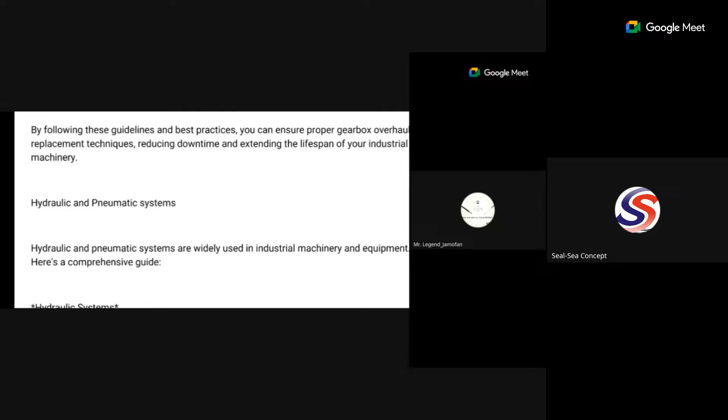So I want to start with hydraulic and pneumatic system.

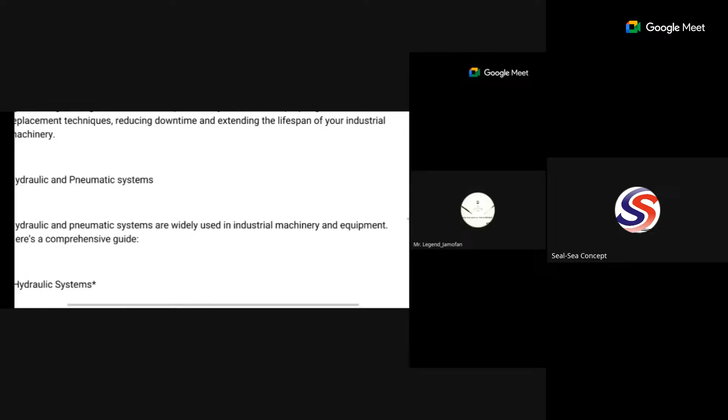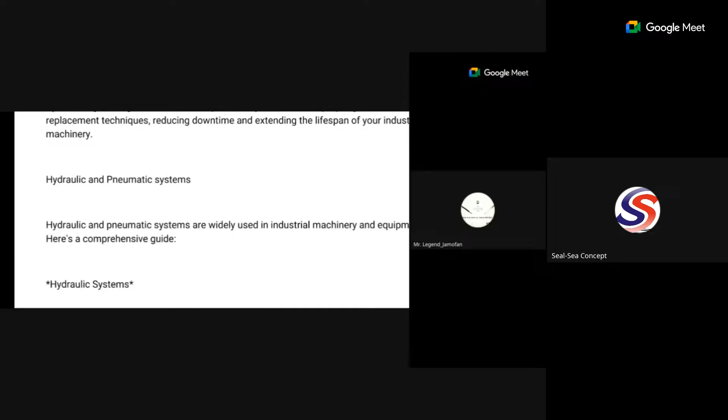So I want to start with hydraulic and pneumatic system. We have really discussed almost the nook and cranny of things that we need to know as basics for machinery maintenance. We have also discussed those that affect the mechanical, like in our second class, we discussed a lot about that.

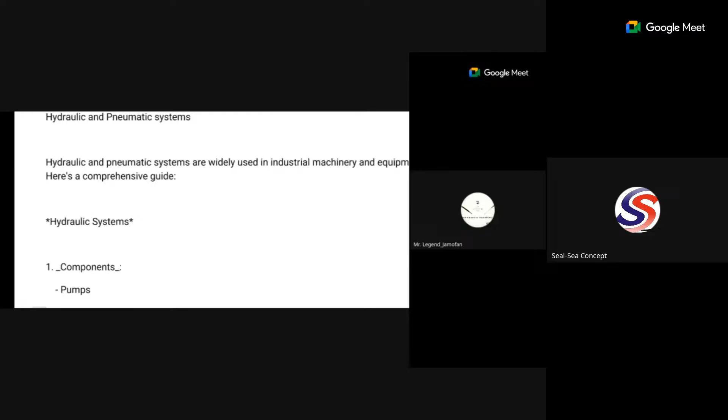I want us to start from hydraulic, then talk about some of the mechanical also, then dive into some part of the electrical, so it will be an all-rounder kind of training, because the plan is to touch all these areas for different kinds of people that we have from different fields who actually registered for this training. So when we talk about hydraulic and pneumatic systems, many of us might have interacted with some of these machines, operated them, or have them in our industrial environments. They are industrial machinery and equipment. Hydraulic system has to do with usage of oil to power some of this machinery, and some are using air as the power, which is pneumatic.

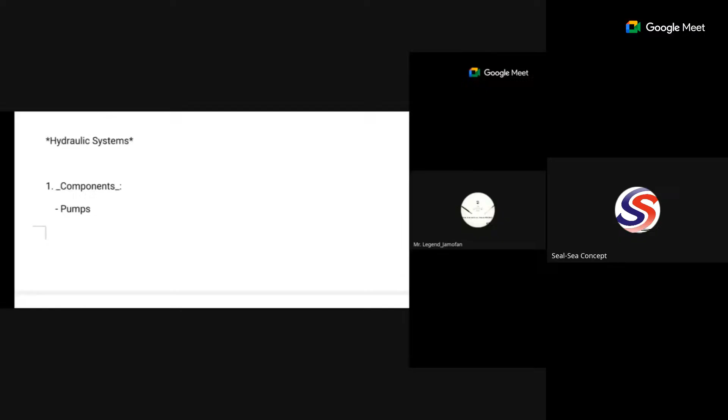So let's briefly look at the components of hydraulic system. In hydraulic system, you can have motors, we have the cylinder, because it's making use of oil. So you have the cylinder, you have the valves. The valves is like an open gate, used to actually regulate the pressure.

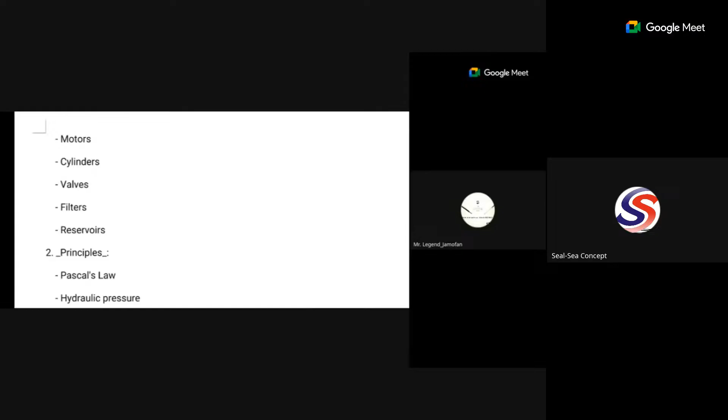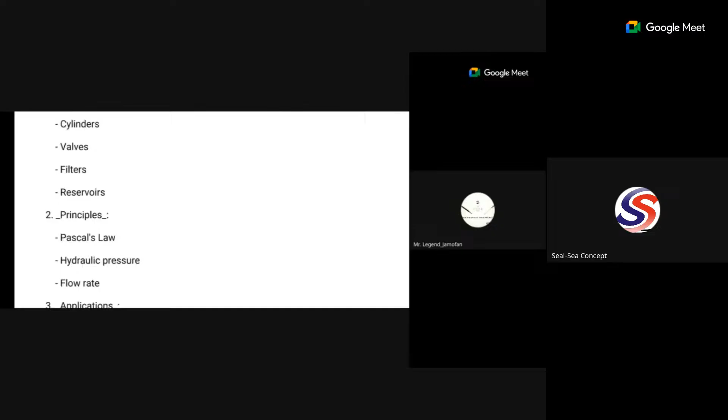We have the filters. I explained some of these in second class, talking about how your oil shouldn't be contaminated. So we have filters there that can filter some of the contamination. In most cases, when performing maintenance, you have to check the filters also, to see if there's clogging happening, holding back debris over time. It's like your gutter -- if you fail to remove those blockages, the water will not be able to flow. Same thing with your filters. If you have contaminations or dirt accumulated on it, sometimes you have to bring it out and clean it, and sometimes you have to change the filter completely, depending on the system you are dealing with.

Pardon me, I'm using a different device. We also have reservoirs. This reservoir is to store the oil that you are using. The oil that you're actually using, you use reservoir to store it.

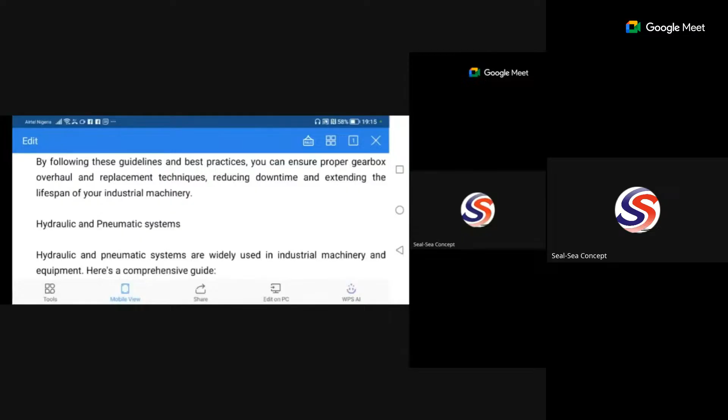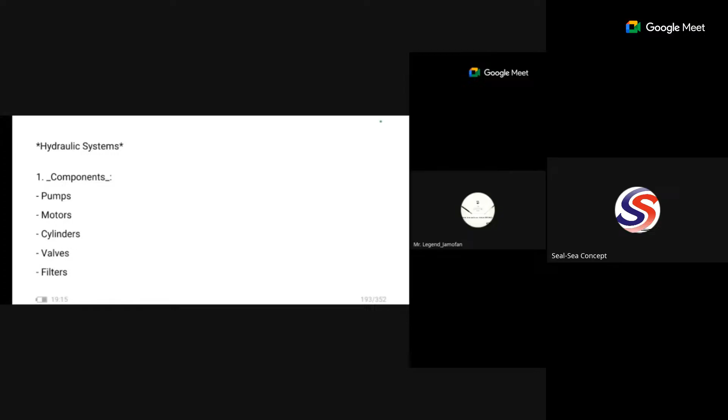So we have the hydraulic components: we have pumps, we have motors, we have cylinders, we have valves, we have filters, we have reservoirs, for the storage of this oil. And what is the working principle that hydraulic system actually works on?

It works on Pascal's law. How many of us still remember Pascal's law? How many of us in the house, the engineering, science-oriented people among us -- in fact, all of us, I expect us to be science-oriented. How many of us still remember Pascal's law? Anybody? There's nobody in the house that remembers Pascal's law. It's been a long time. I think this is just not possible.

Pascal's law is the law applicable when you're talking about pressure -- it governs the transmission of power, the transmission of pressure within that particular container. And when talking about the formula, that's what you actually brought up. But in my own training, it's not the formula I want to treat, it's the application. So, as you rightly said, pressure itself is equal to force over area. That's pressure. But Pascal's law concerns the application of how pressure transmission is in an enclosed container.

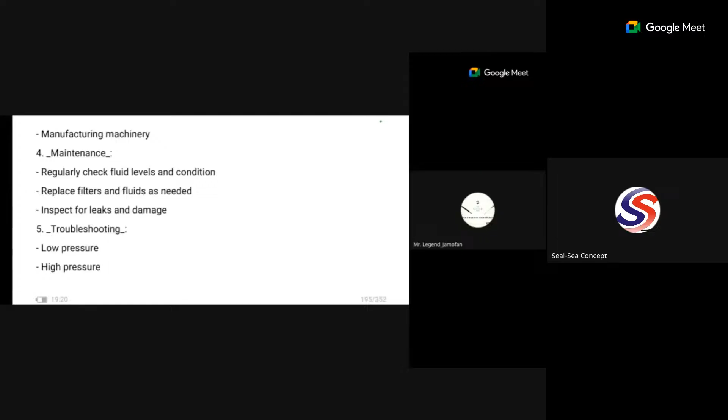Whenever there is a problem with a hydraulic system and you have to troubleshoot, most of the issues you can have is either low pressure, high pressure, leaks, or clogged filters. It's just like packing dirt, dirty or contaminating things, dust and all that, they will clog the filters.

Filters are where the oil is actually passing through. We put the filter there so that only pure and clean oil will be able to flow into the system, and anything that has to do with dirt or contamination in the oil can be retracted by the filter.

So you can imagine if the filter is doing the job over and over again for a long time, and you just leave it there without replacing it. In some systems you have to clean it, but it's good that when performing maintenance, you just change it because of the clogging that may happen. So that's briefly about hydraulics.

Pneumatic systems. In pneumatic systems, we also have components. We have compressors, we have air tanks, we have valves, doing the same work I explained when discussing hydraulic systems. We have cylinders, just as we have in hydraulics, we have motors, that's the drive itself, and then we have filters.

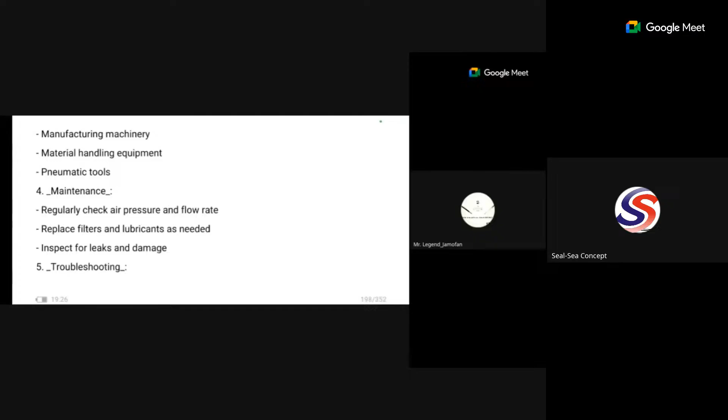Inspect for leaks. How do you carry out troubleshooting? Low air pressure, just as we have in hydraulic, there can be low pressure, there can be high pressure. Within the hydraulic system, or within the pneumatic system, there can be leaks. These are the major issues that you have with the system.

So when you want to troubleshoot a pneumatic system, in your mind you're asking: is this due to high pressure? Troubleshoot with the mindset that it could be low pressure. Troubleshoot with the mindset that it could be leaking somewhere, and troubleshoot with the mindset that the filter could have clogged somewhere. So if you follow this troubleshooting, I'm assuring you, you will resolve the matter.

You see how we put everything together there. So if you have this form, this direction about troubleshooting, it will not be difficult for you to resolve any issues relating to pneumatic or hydraulic systems. So let's bring the common issues together now.

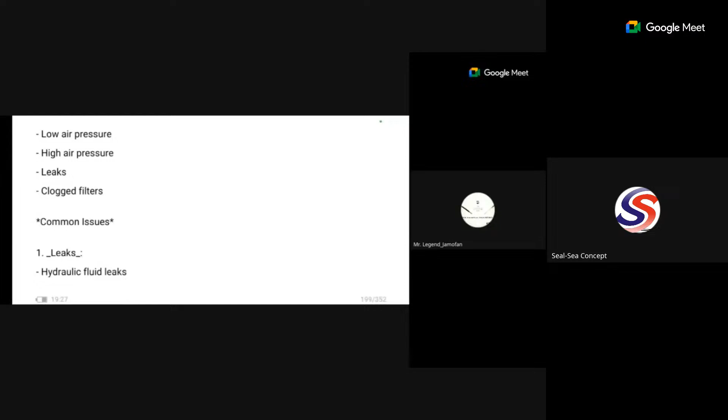The leaks that I explained in the hydraulic system, when you're talking about leaks, we are talking about fluid leaks, when the oil you make use of is leaking somewhere. So that would actually be the problem, you look for leaks in the oil. When it comes to pneumatic, you look for air leaks.

When we talk about clogged filters, the fluid filters could clog, as well as the air filters, as I've explained. You should also check for worn or damaged components, maybe the hydraulic cylinders or the pneumatic cylinders, they could be worn out or damaged. Your valves should be inspected.

There will also be problems with the use of incorrect fluid. I've explained that, and I can't say that more than enough. You have to use the prescribed fluid for the system.

It is very important that the air pressure should be monitored also. The hydraulic fluid pressure should be monitored, and the air pressure should also be monitored. Many people don't know that. People just take their car to vulcanizers, they should actually gauge it for them. And when they gauge your car, the pressure of your tire can be too much, and that would be dangerous for you to drive with.

That is why if you see a very good vulcanizer among others, they will show you, they will bring out the pressure gauge. In fact, you should ask for it. There are many people that even have it in their car. It is not too much, it does not really cost that much for you to have.

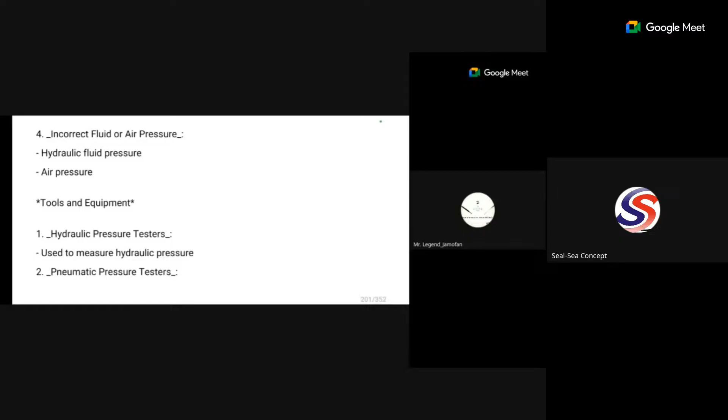Pneumatic pressure testers, okay, for measuring air pressure also, like the one I mentioned about tires. They are there for you to use so that you'll be sure that you're not working with, or driving with, too much pressure or low pressure. In the case of a car, I'm using it as an example. Okay, we use flow meters, we use multimeters in the system.

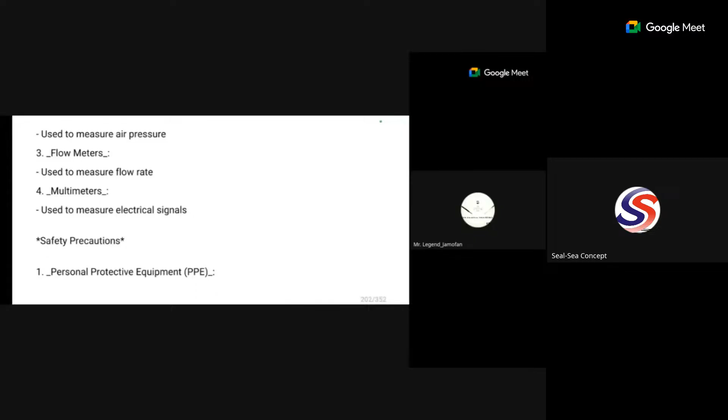The safety remains the same, like we have mentioned in our second class. The safety precautions are always almost the same. Your PPE, your lockout tagout, before you perform maintenance on it. It is happening in a confined space. Confined space entry happens to be where there's a restriction to the entrance of where you want to go and work.

Let's say just one way in. There are some places like that, one way in, one way out. That's confined space, and only one person can bodily enter the place, and you can use only limited time. Maybe if there's anybody here that has worked in a confined space, you can share your experience at the end of the class. So only one person will be able to go in and go out. In fact, in some confined space work, there are people that when they are going in like that, they will have to tie something like a chain to their leg.

Something like a rope or chain will be around their ankle, such that somebody will be outside that will intermittently be checking on them by dragging the chain. So if everything is all right, you kick your leg. The person that is inside, that is working inside, has to kick his leg, drag the chain back, which shows that everything is all right.

If not, if they drag the chain and there's no response, they have to drag him out, because it's a confined space. Sometimes some people go in with additional oxygen to breathe. Sometimes they have to do air tests there to know if they are performing welding work, if there could be fire outbreak or anything like that.

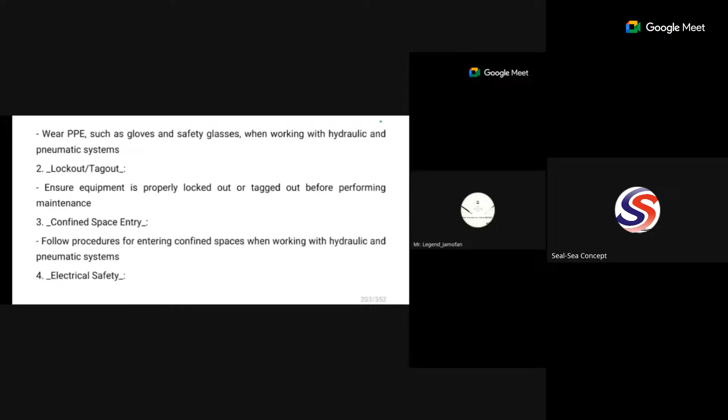So when the pneumatic system that you want to go and maintain is in a confined space, that's what we are talking about. You have to take extraordinary authorization when it comes to safety. Sometimes even the first aiders will be on guard, and everybody will be there because anything could go wrong. So follow the procedures for entering confined spaces when working with hydraulic and pneumatic systems. It is very important. Those are the safety precautions you have to take when working with hydraulic and pneumatic systems.

So what are the best practices recommended for this? Follow the manufacturer's instructions. I've said that over and over again, so I don't need to emphasize on that. Follow the manufacturer's instruction, okay?

Use proper tools to perform your maintenance. Don't try to force tools. Don't say you want to improvise and use a bolt that is supposed to move with a 13 spanner. Sometimes you see most of those things actually happen. You are using a wrong spanner, or a wrong tool on a particular bolt, on a particular joint, for a long time.

So what will you see? You will see that it will round off. Even when you bring the correct tool, you won't be able to open it again. It's sometimes a human fault. Most of these things are human faults, because you are using the wrong tool to perform your maintenance or to do your work or installation.

So use proper tools, okay? The personnel that will carry out the maintenance must be trained personnel, somebody that is trained to do it. We shouldn't just push people to go and say, oh, you can do it, it's a very simple thing, or something that you just watch a video and then want to try it. No, you have to be trained on it.

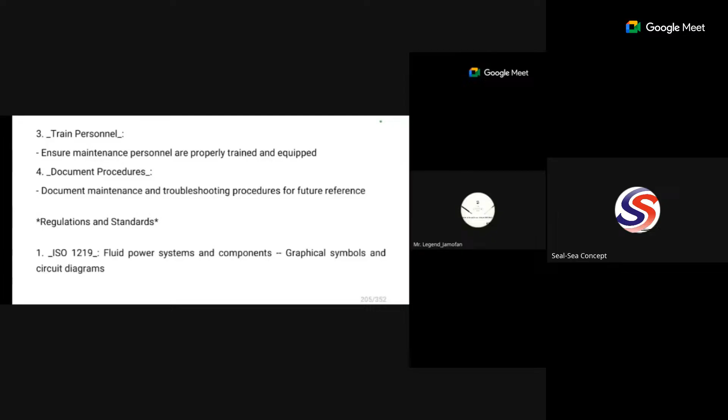If you actually do all these things - should you check the oil level? Must you change the oil? Must you change the filter? Must you do this and that? All those things should be documented. It shouldn't be assumed that you know.

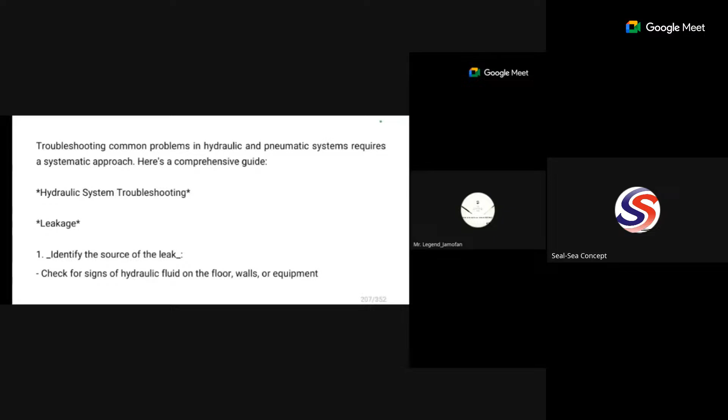And we have some regulations and standards here. I just put it there for you to see that there are standards and regulations that manage all these things across the factory. So I've talked about hydraulic system troubleshooting.

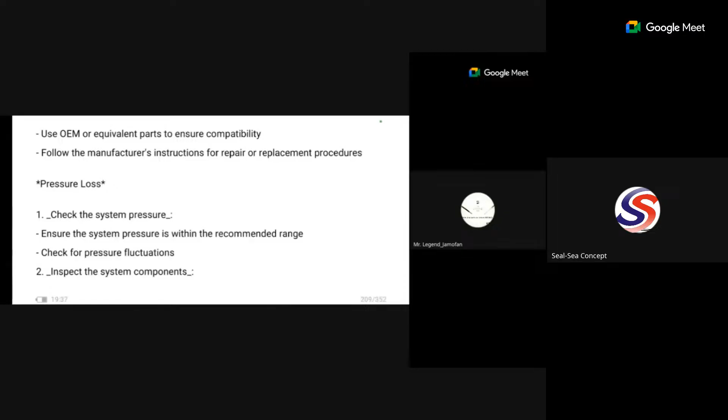So we talked about the pressure, okay? Pneumatic system troubleshooting, I've discussed it. Everything I explained, I tried to elaborate more on. That's what you are seeing that I'm actually sliding, just to elaborate more on it so that you can have my explanation documented. So,

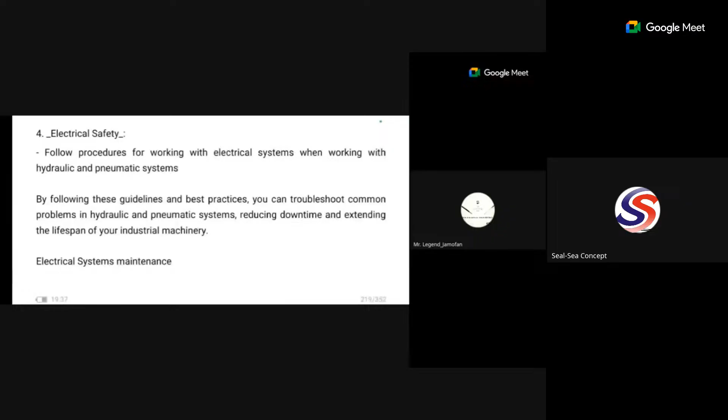All right, so let's talk about electrical system maintenance. What do we do in the course of maintaining electrical system? The regular maintenance, which is the new one, the scheduled one, the popular one that I've been mentioning, that is very important - that's the preventive maintenance.

So the preventive maintenance of electrical systems is that you need to do regular inspections. When we talk about regular inspections, you need to check the system for wears, damages, or overheating. This is very common with electrical systems. Overheating is very common with electrical machinery - most of them suffer a lot from overheating.

So you need to do these regular inspections on them, and you need to inspect electrical connections also. Check your wiring and check the components. It's very important. Sometimes you may have a loose connection, sometimes a dangling connection, sometimes you can have a burnt connection already.

So you need to actually check, because if there's overheating, some parts when you have connected or joined together might be suffering from burnt connections. You need to check this occasionally.

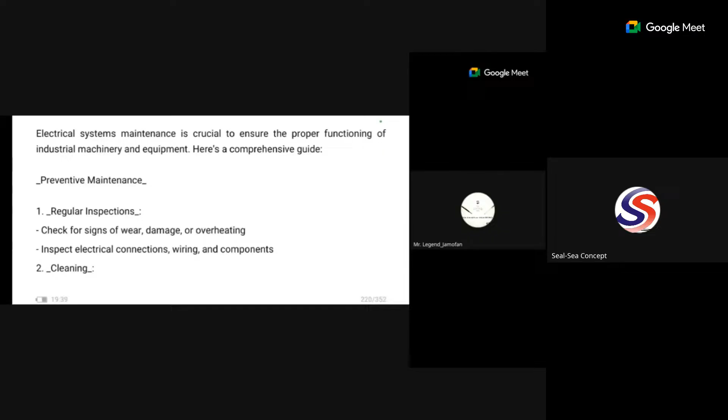When performing maintenance on electrical machinery, you need to do cleaning. Dust alone can make you lose a proper connection, especially with connectors used to connect supply from one joint to another. Try to make sure the place is well dusted. In most cases we use compressed air set to a moderate pressure so it won't affect the dangling wires. We direct it to all those joints or junctions where connections have been made and dust may be covering the conducting area, and we blow away the dust to clean it.

Sometimes people use the compressed air that I mentioned.

Electrical systems must also be well lubricated. Those lubricants are applied to the moving parts, like I explained about friction. You apply lubricant to the bearings and to the gears. The bearing must be lubricated because it is rolling. We have different types of bearings: roller bearing, and a needle type for very small or tight spaces, and ball bearings.

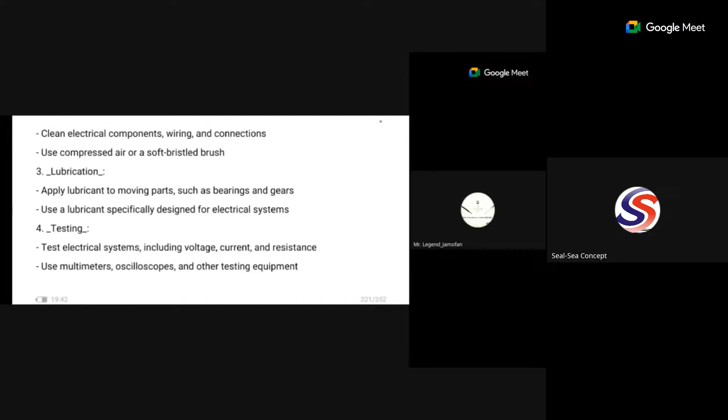You can also test for continuity - I'm going to elaborate on this. You can do insulation tests to be sure the insulators have not broken down, so you won't receive a shock from the system. I'm going to elaborate on this as well.

Corrective maintenance on electrical systems or machinery refers to troubleshooting, because corrective maintenance has to do with repair, as I mentioned. When the system or machine runs to failure and you have to repair it, bringing it back to function, that's what we call corrective maintenance. We've explained this a lot.

So what you need to do is first identify the source of the electrical fault - you need to know what is wrong with the system, which part has actually failed. That's what you need to troubleshoot for. In doing that, you can use testing equipment or diagnosis tools, or you can use observation.

You can, with power on the system, see if the electric motor is struggling, trying to work but struggling like it's overloaded. So you can know the proper places to check, or use a multimeter to carry out troubleshooting. Then you either replace the electric motor or a part. Some factories I've seen, when the electric motor is faulty, bring it out and replace it. But in most industries where I've worked, they send it to the workshop.

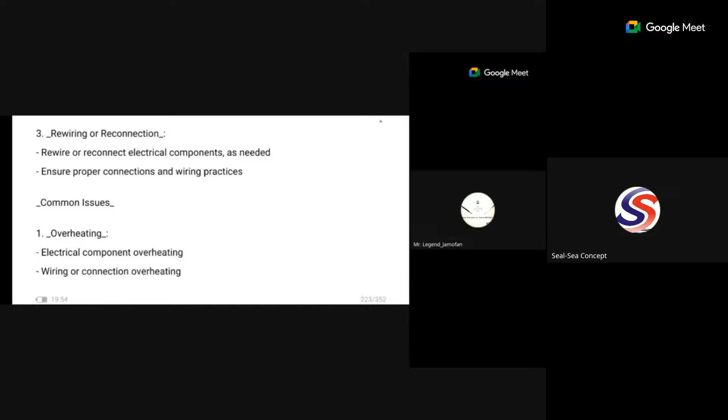Short circuits happen in the conductor carrying live - that's the live conductor - shorting with the ground, that's the neutral. Let me try to bring this up. Let me bring up my whiteboard so that we can see what I'm talking about. I don't want to assume that we are all electrically oriented.

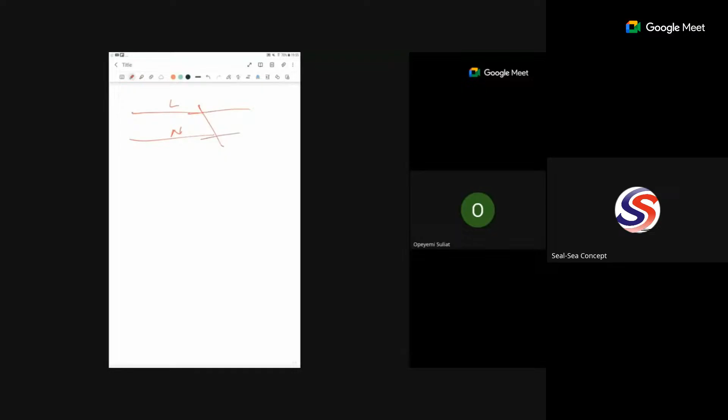Of course, even the mechanical guys know that there is always live, there is always neutral. So if this actually shorts with this, that's what we're talking about - short circuits. These wires that are supposed to be parallel to each other, they're supposed not to meet. Both of them are supposed to go like this. But in case of a short circuit, both of them now touch. That is short circuit, so you can look out for that kind of fault.

And it can happen when there's overheating. There are some wires that pass through the same pipe - so there is a pipe, and you run the wire through them. If there's overheating, one of them or both of them can lose their insulation. If the insulation peels off here, and if these should short together, there will be a short circuit.

Unless you are able to troubleshoot and check for continuity - there's a way you can perform a continuity test between the two wires, and you see that there is a flow or low resistance between them, it shows that they are touching something. You have to trace that wire or connection and resolve it. I'm going to elaborate on that when I'm talking about using the multimeter for testing.

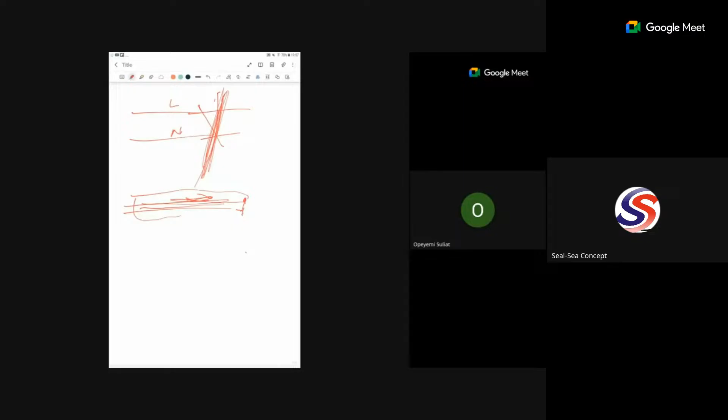I had a very funny experience with this. There was a time we were resolving a fault on a frequency drive. Anytime you are working on it, everybody who has worked on that equipment before will know that instrumentation will come, the power will come, that's electrical will come. So most of the problems from VFD in most cases is actually the instrumentation aspect, because it has to do with the electronics aspect.

The only thing that power will do is test the voltage that is going into the input. Once they test the voltage and it is the correct voltage that's supposed to go in, they will now go outside and see that it is not giving the correct voltage it's supposed to give out. That means there is a problem in the electronics system, because VFD is used to vary the speed of an electric motor. In most cases the system works such that when AC comes in, they convert it to DC, and then alter it back to AC.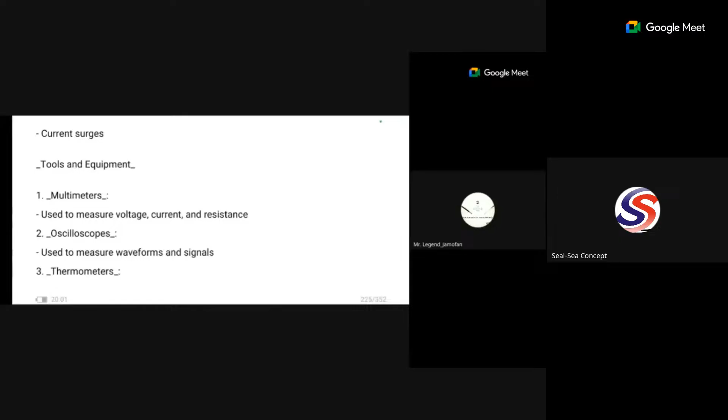So we use thermometers to measure temperature, because I explained that most of the problem with electrical systems or machines is overheating. So you have to monitor the level of temperature. Every system has the temperature that it can actually withstand.

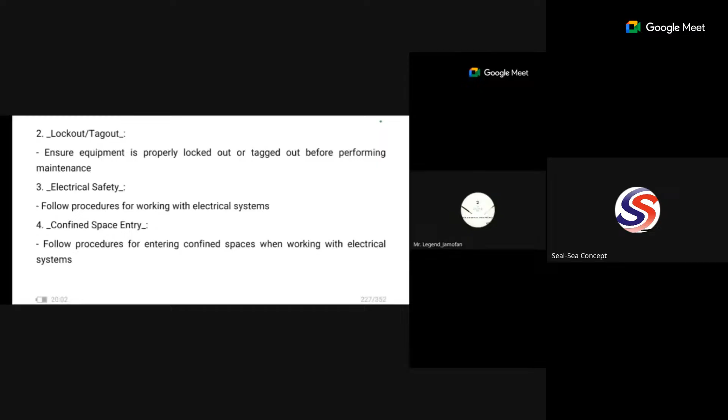What are the safety precautions? We have mentioned this, lockout/tagout, following electrical safety working procedures. If it's a confined space entry, you must also follow it. Best practices include following the manufacturer's instructions, using proper tools, ensuring personnel are trained, having the procedures documented, and following regulations and standards.

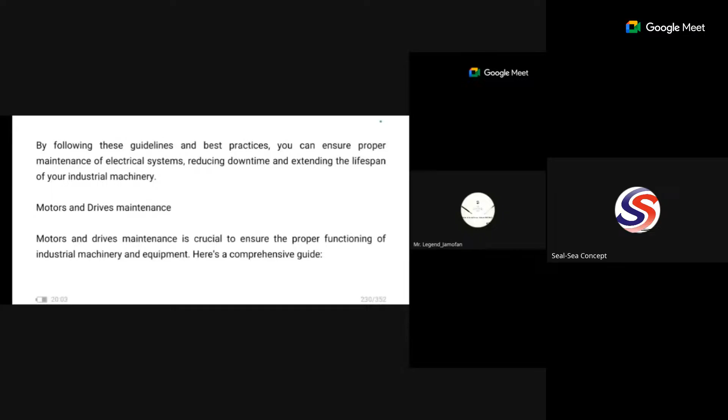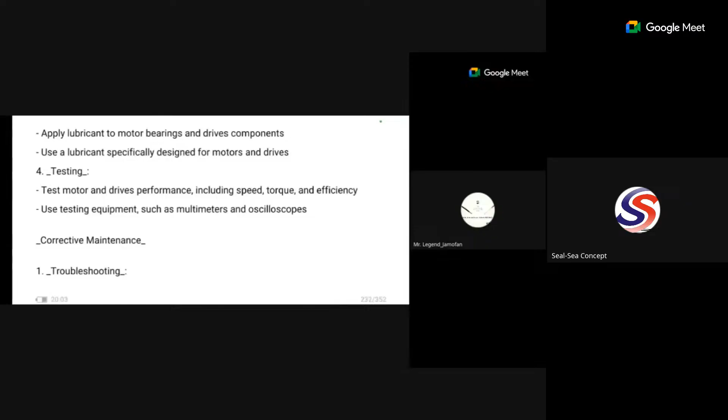When we are talking about electrical machines, most cases across industry, what you have are the motors and the drives. Because if the machine has any moving parts, there must be electric motors or drives that are actually driving it. All the preventive maintenance that we earlier mentioned about electrical machineries also applies to them, and corrective maintenance is also applicable to them.

In your drives and motors, what you can have as common issues includes overheating, which I've mentioned is generally applicable to electrical machines. There can be drives overheating, motor overheating, and vibration. In most cases, your motor will vibrate because there is always a coupling system.

Coupling system is all - if it's not coupling system, the motor is being mounted on a stand. If it's not stable, sometimes it's bolted to the ground. If the bolt has been removed, there will be vibration in the electric motor, and that will affect the proper and smooth running of the electric motor.

So you have to check for vibrations and misalignment. There may be misalignments - it happens a lot, especially if it's a belt coupling or chain coupling, anything like that. So you have to check for misalignment.

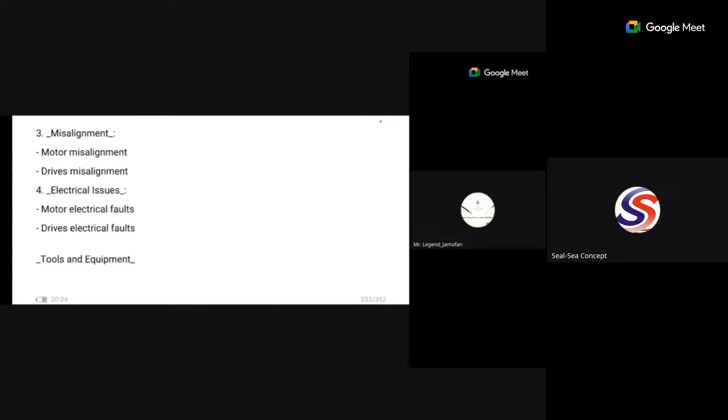In conveyor belt misalignment, there are some sensors that are normally used. Like in one of the companies where I worked, we have what we call sway sensors. The sway sensor is just like a plunger - let me show you how it looks. We call it sway sensors, because it ensures the belt will not sway off.

So this is the belt, there's a roller beneath it. If this bed should shift to this direction, it will touch this sway switch and turn it. So when it turns, the output goes to an alarm or a trigger.

In most cases, the interlocking, when we're talking about interlocking, is done in electrical wiring such that you can have the safety of the machine. For example, let me try to break this down.

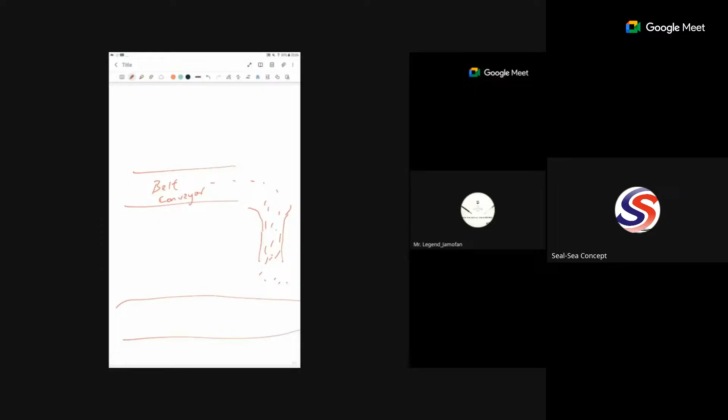Let's say we have these conveyor belts. This conveyor belt - maybe the material that is coming will fill up this place, and that material is supposed to be passing through these chutes. It's supposed to pass through these chutes and land on another bed that will take it to another unit of the company. So you can see this is section A, this is section B.

In section A, the material is coming in, it will pass through these chutes, fall inside these chutes, and from that chute it will be falling onto another bed that will carry it. There's a way we can put a level sensor, because sometimes this material can clog around here such that it will not be dropping onto belt B - it will be blocked, and the material coming in will be heaping up. So there's a way we can put a level sensor here.

Maybe a level sensor, using a proximity sensor or level sensor that senses the height of this material. Once this material has come up here, we connect the output of this sensor to the electric motor driving this bed, such that once this sensor gives an output, it will switch off the electric motor controlling belt A. So belt A will switch off immediately - why are we switching it off? So that more materials will not be coming here and it will not be wasted or falling off.

So the process guy will compulsorily have to come to this unit, clear this chute, make sure that the chute is free now, and when it becomes free, they can tell the control room, they will power up again and the system will continue running. So we use it for interlocking - if there is a problem in this particular unit, let that unit be switched off. So we can say if there is a problem in unit B, unit A switches off. We call it interlock - that is, you are locking them together so that there will not be a problem or wastage along the line, or any threat to the safety of the equipment or the workers.

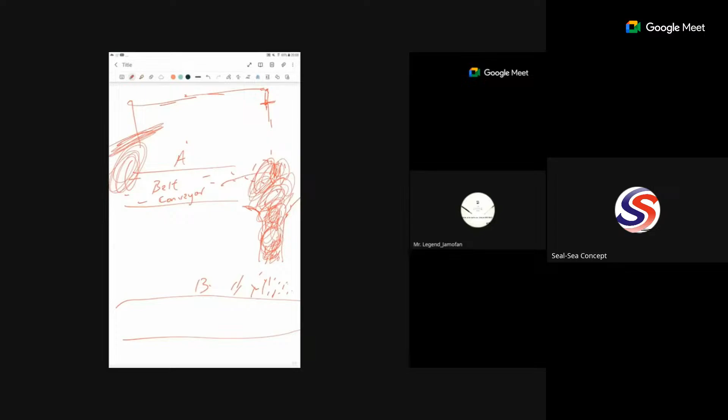So that's the same way that switch also works, because if these belts should sway away, all the material that is here will be wasted.

Sometimes the process guy will have to come and manually pack that material. Once this belt is swaying, drifting off the drum on which it is being driven, it will touch this switch, and the switch will activate an output that switches off the electric motor driving this belt. So the electric motor driving it will have to go off compulsorily.

Now, when we come there, we will see that the swing belt has caused the switch to trip, and the fault will show on the system at the control room - that this particular switch, with its code or identity number, has an error. They will go and see that the belt is already swinging, adjust the alignment of the belts, and return the switch to its normal position. That is when they can power on.

So this alignment, or coupling system, is a very big issue that you should work out when it comes to electric machines. So let me bring up my slide.

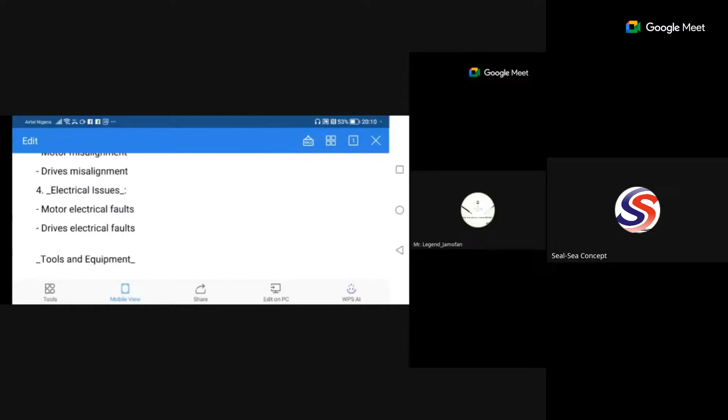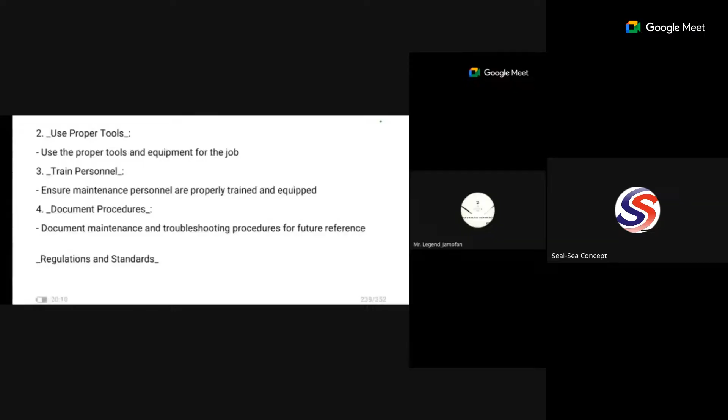So I've discussed the tools and equipment. The vibration analyzer can also be used. The safety aspects remain the same. What are the best practices? Follow the manufacturer's instructions, use proper tools, train personnel, document procedures, and examine the standards. So I've discussed all that.

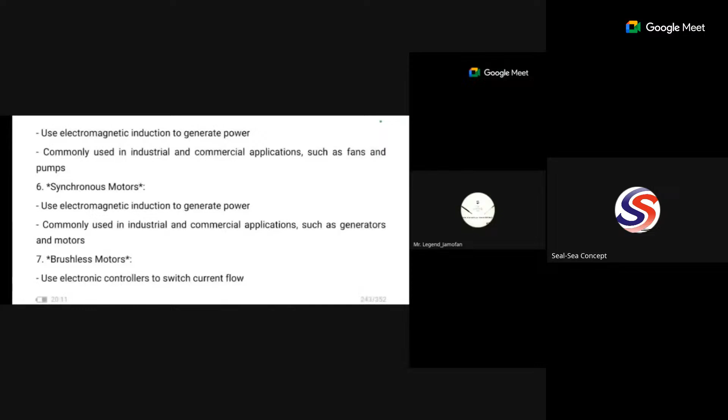So for electric motors, we also have different types. We have direct current motors - these require steady voltage. We have AC, that's alternating current. I don't want to go into that, but I've done a lot of analysis for you in the material here. I don't want to touch the theoretical aspects of it.

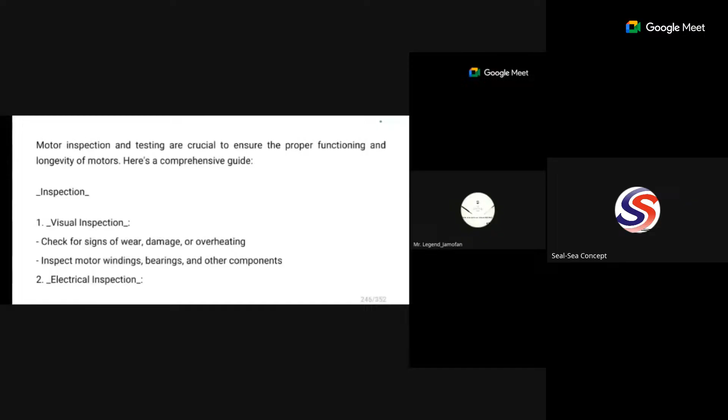But the one I want to talk about is the inspection, the testing. What are the tests you need to carry out on your drives or electric motors? There's what we call no-load testing. I think on the first day of class I briefly mentioned this. No-load simply means you disengage the electric motor from whatever it is driving, then try to run the electric motor and observe it, listen to how it sounds and everything.

So with that, you can tell if there's any problem with it or not. Let me give you an illustration of that.

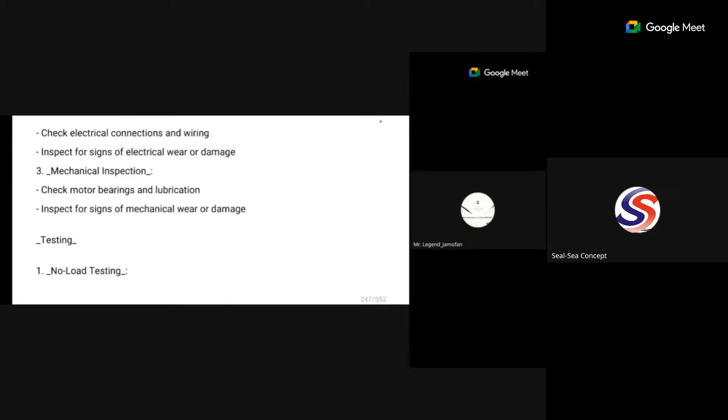Sometimes when you perform a particular maintenance on your car, you may be at a shop and the mechanic will tell you to raise the car. You want to listen to how it sounds. After you raise it, with no AC on, they will not tell you to put on the AC - they want to listen to the engine. If the engine is fine, and if you are driving automatic, they will actually fire up your car and drive it around to see if it changes gear automatically. That is the way they actually do all this testing.

So you can do a no-load testing - test the motor without a load so you can check for unusual vibrations, noise, and overheating, just as I've mentioned. You will now do what we call load testing again.

In load testing, you are going to actually load it - couple the electric motor with whatever it is driving, and then observe it to see if the rotation is fine, if the torque is fine - that's the spinning, the rotation, the movement. I don't want to go into too much theory with that. So you check the efficiency and all that.

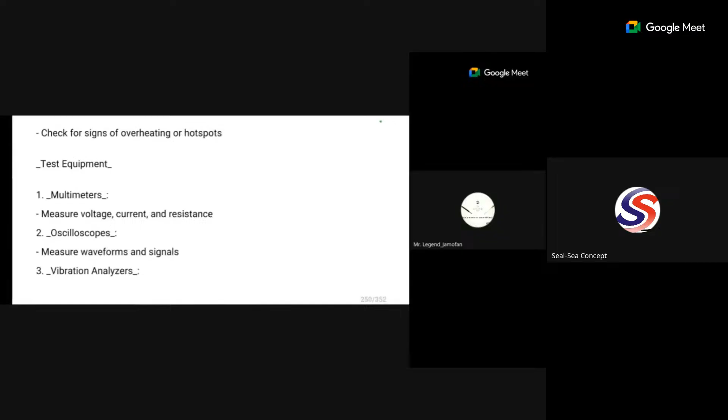You also test out the insulation resistance. I will come back to that when I'm talking about testing with a multimeter - I'm going to explain that. We have an overwhelming - so another electrical part that needs maintenance is your VFD.

I've mentioned this. VFD is actually used to alter the speed of your electric motor. There are some electric motors that you don't drive on a steady speed.

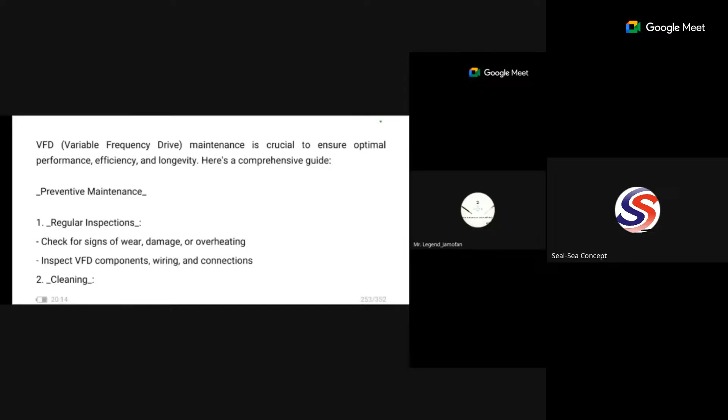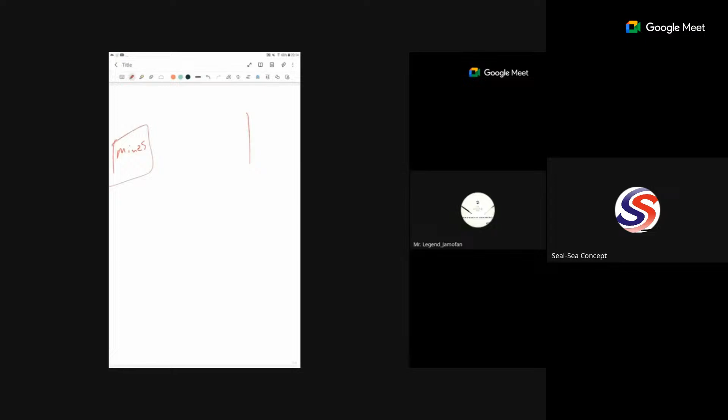For instance, let me use my experience. Back then in the cement factory where I worked, we have a conveyor belt that runs from the mines, about 10 kilometers. So let's say this is the mines, and this is the factory, very far from the mines.

So in the mines there is blasting of limestones and everything. That's where the raw materials we use for manufacturing cement are. So there is a conveyor belt from the mines.

I just want to tell you, because these belts actually make use of VFD. They use VFD to drive these belts, and I want to show you equipment that makes use of VFD. Materials will have to come from the mines, and then these materials will go to what we call mixed storage. That's where they actually store them.

Sometimes there may be production in the factory where all the storage in this mixed storage is almost exhausted, and they don't want production to stop. They want production to be going on. So what do they have to do? They need materials urgently and very fast from the mines down to the factory. In that case, they need the electric motor driving this belt to work at a very fast speed.

That is why they need VFD there, so that if you want it to work at a fast speed, you can achieve it. If you want it to work at a slow speed, I'll tell you, this is the case where we need material and this drive has to work very fast, so we need a fast speed.

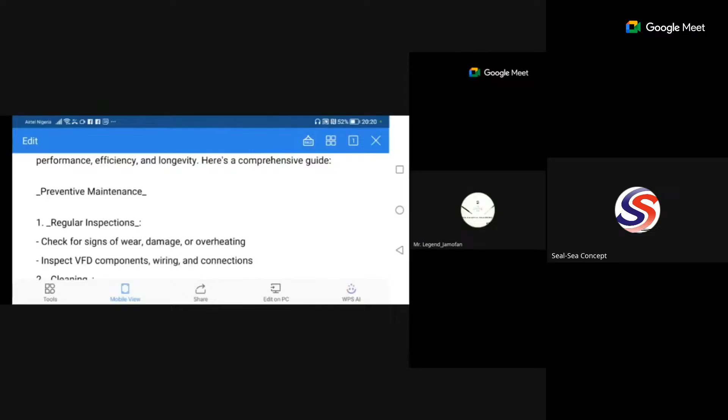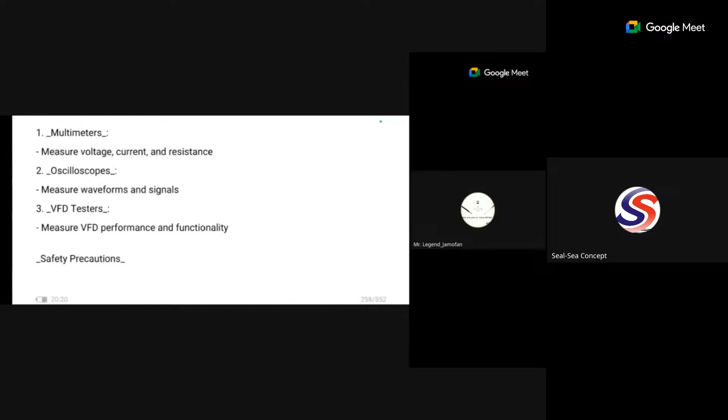So the preventive maintenance on a VFD: check for signs of wear, damage, and overheating. These are general things to look out for, like the wiring and the connections. It's just like the same thing you do on drive, which I've already explained.

The safety aspect is still the same. In industry, we also have the maintenance of sensors and actuators. Is there anybody here who can give me the name of a sensor used in your company?

There are different sensors. Proximity sensor - thank you, that's very common. They want to know if this thing is still in position or not, that's the meaning of proximity sensor. Emmanuel, you have one you wanted to mention? Capacitive sensor - okay, thank you.

So we have a whole lot of sensors. You have reflective sensor, reflective level sensor. Do you make use of level sensor in your company too? Yes. Okay, level sensor, thank you. So we have maintenance of these sensors also.

Actuators - what is their use? An actuator is the component of the machine responsible for movement. It converts whatever the energy source of the machine is into mechanical energy, which is the movement. So the actuator is the one that causes movement in the machine. We maintain them too, and their general maintenance is not far-fetched from what we have discussed so far.

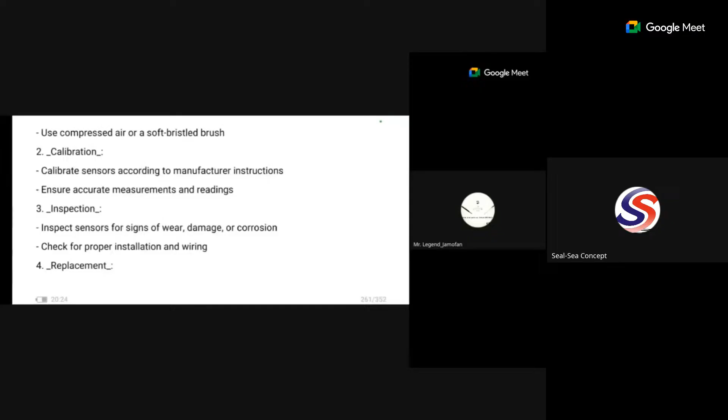In most cases, when sensors are down, troubleshooting shows it's actually the sensor giving you a problem, so replace them. I hardly see where they want to repair sensors in the industry. In most cases, they replace them if you want an accurate result.

Don't forget to also consult your OEM, that's original equipment manufacturer. So that's sensor maintenance, now let's talk about actuator maintenance.

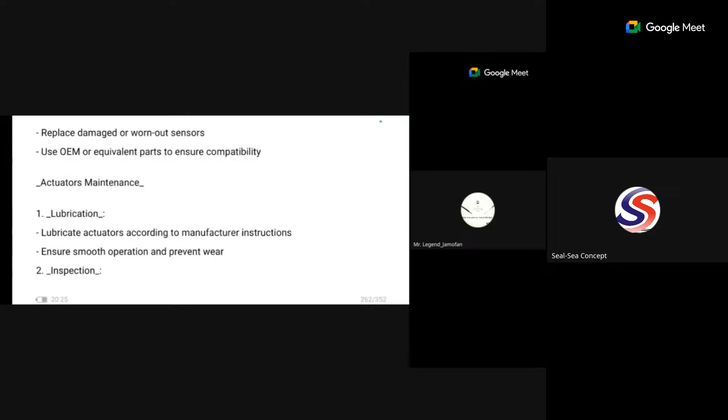Actuator maintenance - I've explained that the actuator is the part of the machine that causes movement. So when I mention movement, you should know you're going to need lubrication. Actuators must be lubricated. You must inspect them for signs of friction, since there will be friction in them, there could be possible wear, damage, or corrosion.

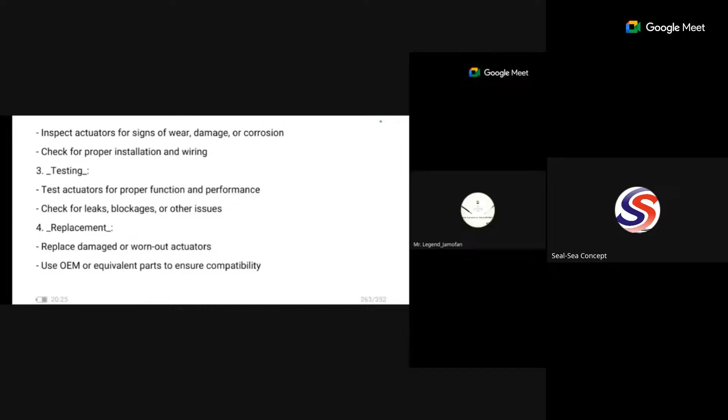You test them also to check their performance, and in most cases you replace them when they are giving you issues.

The common issues with your actuator are drifting or inaccurate movement. There was a time I was driving and I was feeling vibration - you know definitely that something is wrong.

When you are working with a machine and you see it moving, the actuator movement is actually happening, but you know the movement is not normal. You will know because that's not your first time using the machine - it will be an irregular movement, so you should watch out for that.

That can also point to faulty wiring. You should check out for faulty wiring or faulty connections.

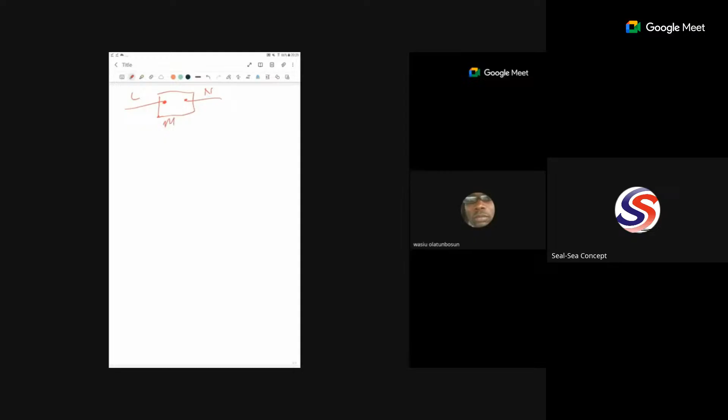You can use it to test for voltage. That's what we call a multimeter, meaning you can use it to test for multiple electrical parameters. The instrument to test for voltage is called a voltmeter. The instrument to test for current is an ammeter. And for resistance, it's an ohmmeter. But now we have one instrument built for all these parameters, and that's what we call a multimeter.

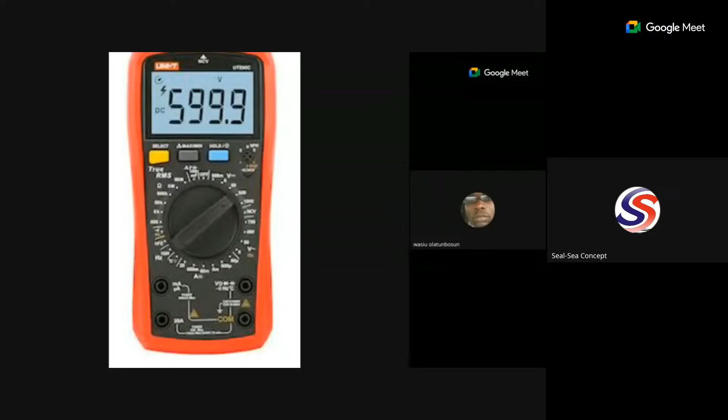When using a multimeter, whatever parameter you want to test for, you must set the knob to that parameter. So if it's voltage you want to measure, set it to voltage. And don't forget, you should know the kind of voltage you want to measure - is it AC or DC?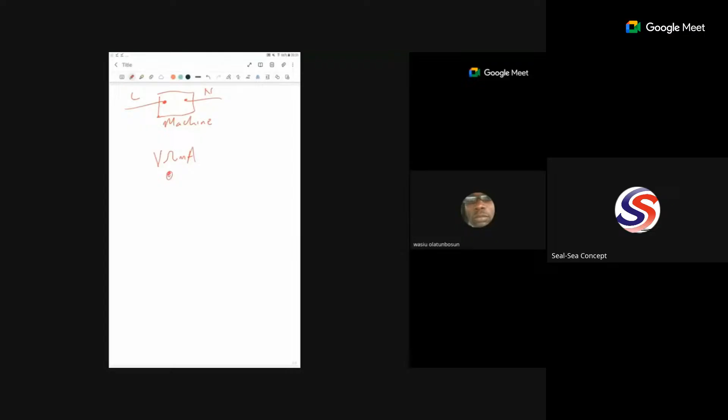Your probe, the red one, will go into the terminal that reads something like V. Some will show ampere. So the red probe goes into this particular place - you connect it there. The other one, you see it marked as common, which means grounding, or your negative aspect, or the return for the flow to complete the circuit.

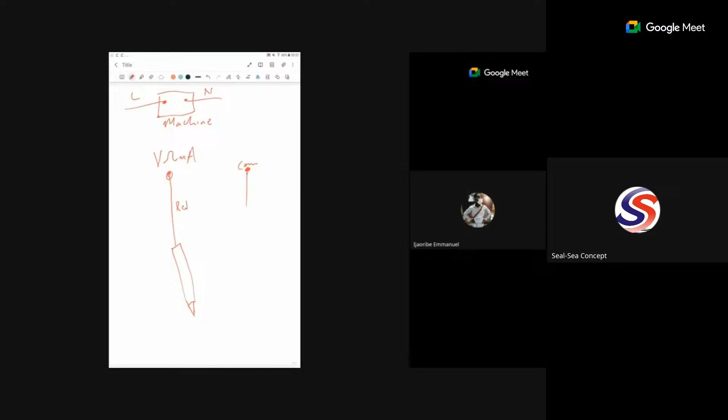So you put your red probe, and then your black probe, you put it in this one. These are the two outputs you will use to touch the circuit - this one and this one. Don't forget, while doing this, your knob must already be set to the voltage you need to measure, and you should know the quantity of voltage specified on that system, which is also on your multimeter.

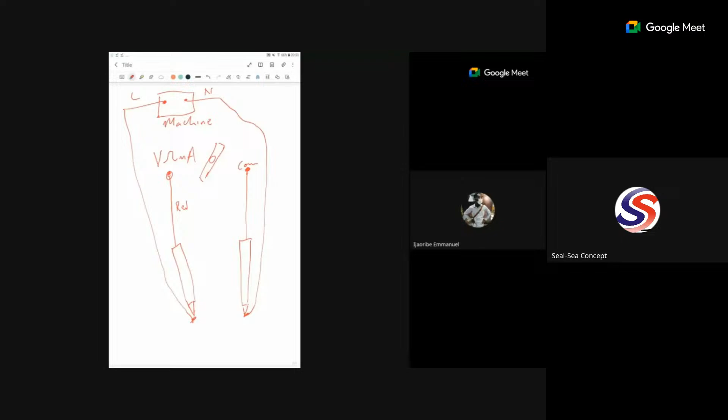So if you want to test for something more than 200 volts, and you set your probe to a range that only reaches a maximum of 150 volts, you will damage that multimeter because the voltage you set is lower than the voltage that will flow through it. So you must set it to the correct range for that particular measurement.

So you put it here, and with your digital or analog multimeter, it will display the voltage in the system. Now, when testing for voltage, you should know that testing of voltage is done on a live circuit - meaning the system is powered. It has to be powered. You don't test for voltage on a dead circuit; you test for voltage on a live circuit.

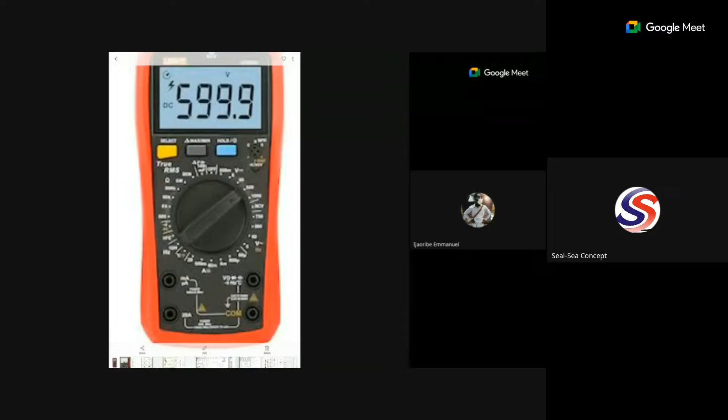The same thing applies when you want to test for current. You go back to your knob and look for current - that's the ampere setting. You look for it; it's somewhere down here. Then you set your red probe accordingly.

Your red probe will go to the appropriate terminal. Set your knob to either DC current or AC current. If you are measuring AC, your knob should be set to AC. If you are measuring DC, your knob should be set to DC. I'm mentioning this because you have to be very careful - make sure the parameter you are measuring matches what you set your multimeter to. If not, you damage the multimeter.

This happens a lot for people who don't know how to use a multimeter. So check that parameter, make sure you set the knob to the correct measurement, and then use your probe for current the same way. As you can see here, it can measure voltage, ohms which is resistance, or ampere which is current, even milliampere. Your red probe stays there, and your black probe still goes to common, and then you take your measurement.

Again, you can test out for current on live circuits. It is only when you are testing for resistance that you need to make sure that you are working on a dead circuit. Test it out on a dead circuit, that is the circuit should not be powered. Why are you testing for resistance? You need to see what amount of current will flow. If resistance is high, it means no current will flow through it, and if resistance is low, it means higher current will flow through it.

How do you test for continuity? Go back to your multimeter. You will see a symbol that looks like the symbol of a diode. Let me draw it for you to see. You will see something like this, to get a continuous flow between them.

So you set your knob to this continuity setting, and then you put your probe. Your red probe should be put on this, and the black should actually be put on COM also. Then you come here, you put your probe here. Any of the probes can be used. You put one here, you put one here.

So if the multimeter beeps, or if there's any low resistance being read or displayed, it means that there's continuity between here and here. That means your wire does not have a problem from point A to point B.

You put another cord here, which is point C, so you test. If there's no continuity, you do not get any beep, or you get a high resistance, it means that there's no continuity there. So this wire already has a problem around this place. Either you cut it off here and replace it with a good wire, join it, or completely replace the length of this wire, and resolve the problem.

So that is continuity testing using the multimeter.

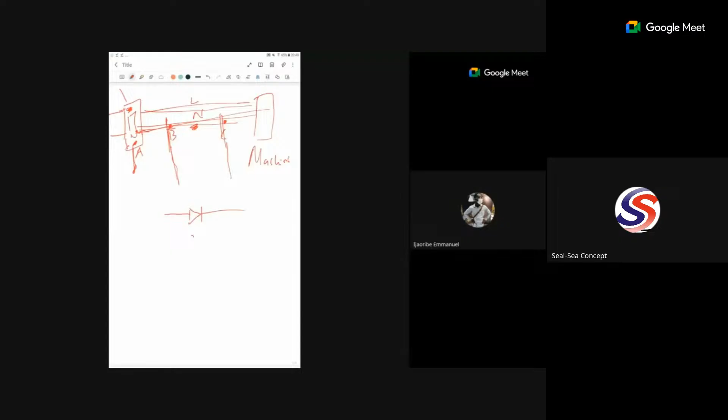This is important when it comes to electrical maintenance, electrical preventive maintenance, and electrical corrective maintenance. When you are repairing or troubleshooting, it is very important that you should be skillful in it.

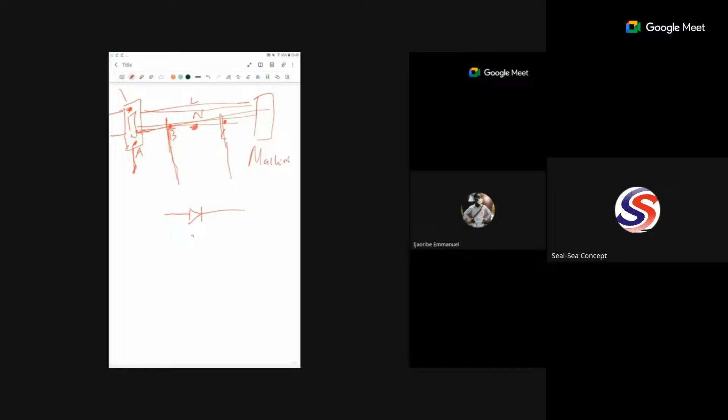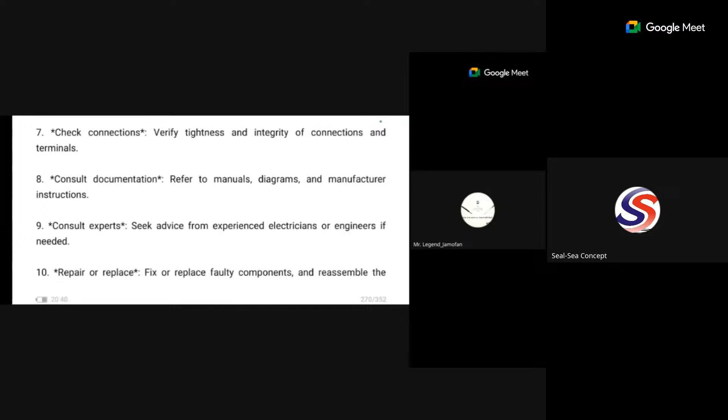I've promised not to use all my time, but I'm tempted to use another 5 minutes, so let me try to bring everything together. Yes, we have done well. I think I've touched mechanical, control systems, electrical, hydraulic, and pneumatic. I want to appreciate everyone, and you will have the rest of the analysis in the material. I want to appreciate everyone who explained about short circuit and ground fault.

Let me briefly explain this. Another issue many normally have with electrical systems is grounding and earthing. There is a big difference between earthing and grounding. Grounding is when you connect the conducting parts in a machine down to the earth - that is grounding. Earthing is when you connect the...

non-conducting parts. Let me see if I can bring something up for you. Earthing is when you connect the non-conducting part of a machine to the ground, and the main purpose of doing that is to prevent shock.

I want to see if I can actually display something that would show you earthing and grounding.

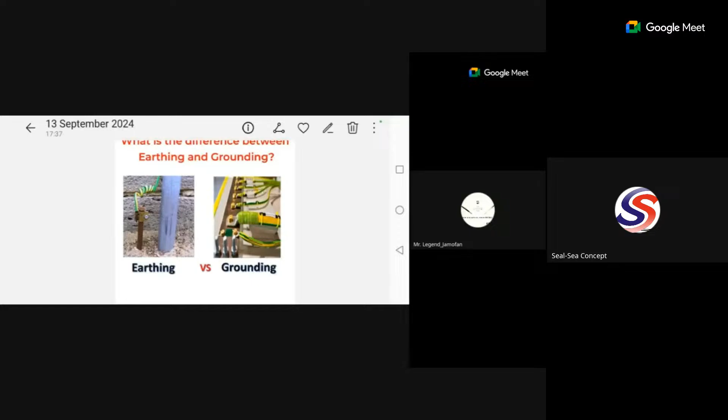So you can see earthing here. So you see this pipe now - this pipe that you are seeing is just the body, it's a non-conductor. This pipe is not expected to actually conduct anything. So that wire connected to it and earthed is just in case, because this pipe here is housing the electrical conductor that goes through it.

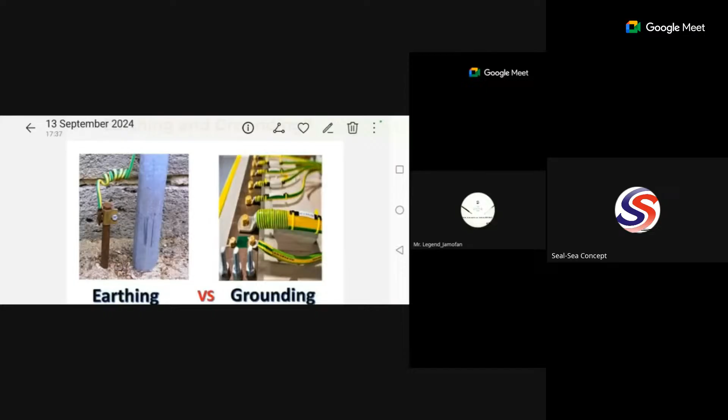So it's not expected to conduct, but let's say something happened - let's say it rained and the insulation failed, and it's now conducting. So what do we do? We earth it so that there won't be any shock. But you see the other one, grounding - those cables used for grounding are connected on the conducting part, and they are connected straight to the earth so that there will be load balancing. There will not be an imbalance in the load, and at the same time it's also indirectly protecting you from shock. So it is very important for us to also note that.

So thank you very much. I want to appreciate you once again for being patient with me. You know, as a trainer, I know I talk too much. Thank you so much, I appreciate everyone. So Mr. Moderator, over to you.